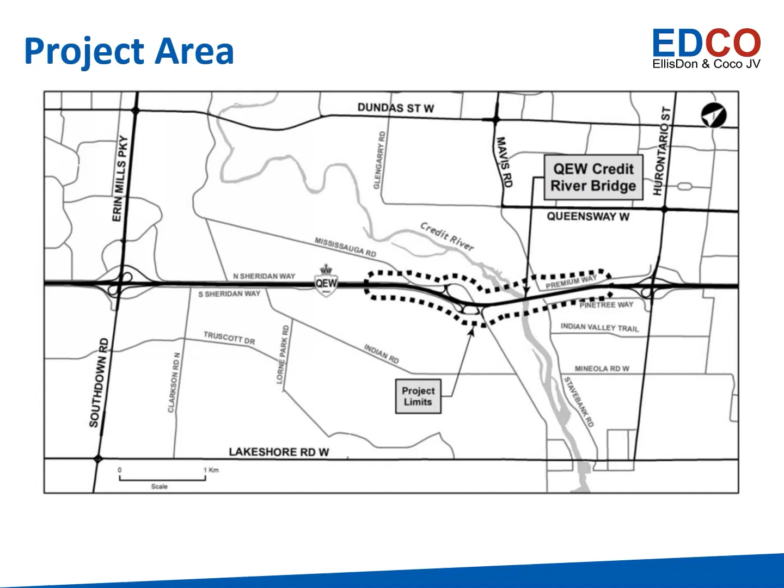The purpose of this PIC is to present the designs for the following project components and receive feedback on the rehabilitation of the existing QEW Credit River Bridge, active transportation crossing of the Credit River, landscape design, commemorative strategy, detailed design refinements, and traffic staging.

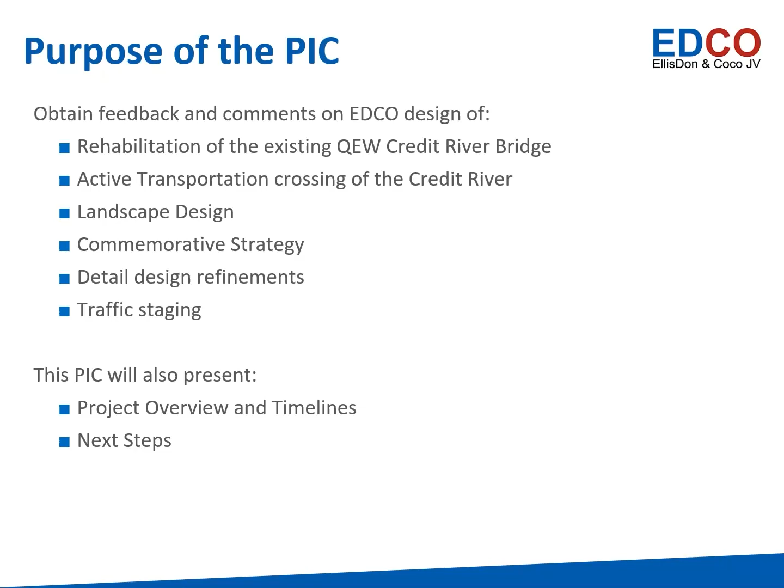This PIC will also present project overview and timelines, and next steps. Materials related to this PIC will be available on the project website for you to review and provide comments on the PIC event and during comment period. Directions and opportunities to provide comments will be identified during this presentation and available to you through the project website.

The QEW Credit River Improvement Project involves several components. EDCO has started construction of the components of the project for which detailed design was completed. The design of these elements was documented in Design and Construction Report Number 2, which was made available for stakeholder review in January of 2021.

This included the new QEW bridge over the Credit River and widening of the QEW mainline highway to accommodate the widening of the highway, reconfiguration of the Mississauga Road interchange with replacement of the existing bridge at Mississauga Road.

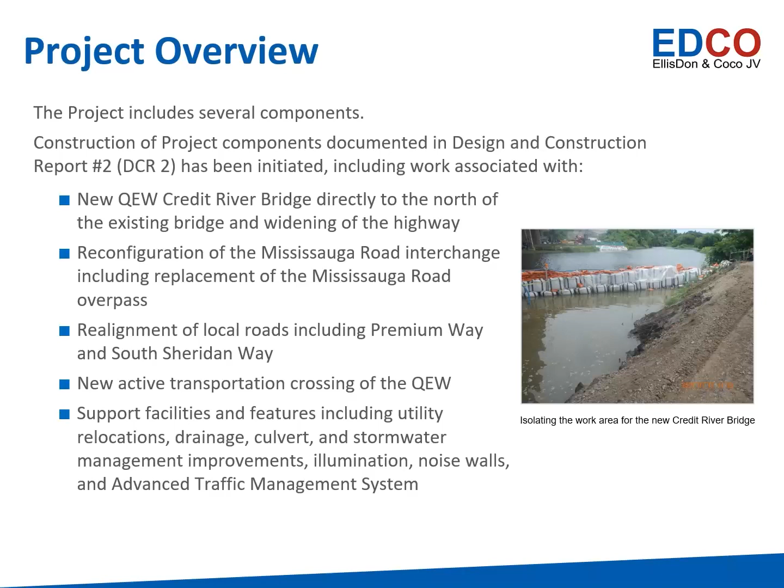Realignment of local roads including Premium Way and South Sheridan Way, new active transportation bridges over the QEW, support facilities and features including utility relocations, drainage, culvert and stormwater management improvements, illumination, noise walls, and advanced traffic management system.

Since January 2021, EDCO has been able to advance design for the other components of the project, including works associated with rehabilitation of the existing QEW bridge over the Credit River, new active transportation bridges over the Credit River and over the QEW highway near Stavebank Creek, landscape design.

Initial design elements associated with the commemorative strategy have also been identified. This project is following the requirements of a Group B project under the MTO Class Environmental Assessment for Provincial Transportation Facilities, also known as the MTO Class EA process.

Comments and feedback on the design being presented at this PIC are being collected to assist EDCO and MTO to meet the requirements of the MTO Class EA and the Ontario Environmental Assessment Act.

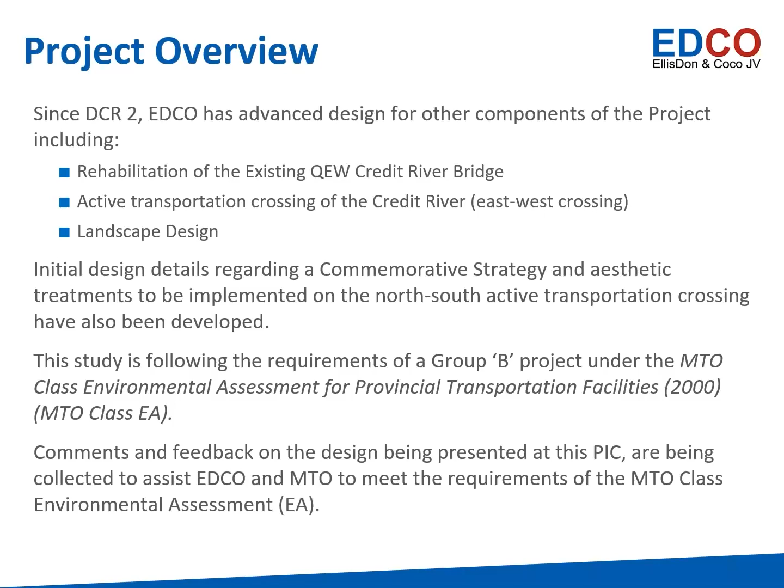EDCO's involvement in the project began in fall 2020 when we were selected to design, build, and finance the project. One of our first tasks was filing of Design and Construction Report Number 2 for stakeholder review and comment in January 2021.

Environmental clearance for DCR2 work was first issued in March of 2021, allowing for construction of project elements detailed in DCR2 to begin. Construction by EDCO then started in April 2021. Hosting the Public Information Center on August 5, 2021 is our current status.

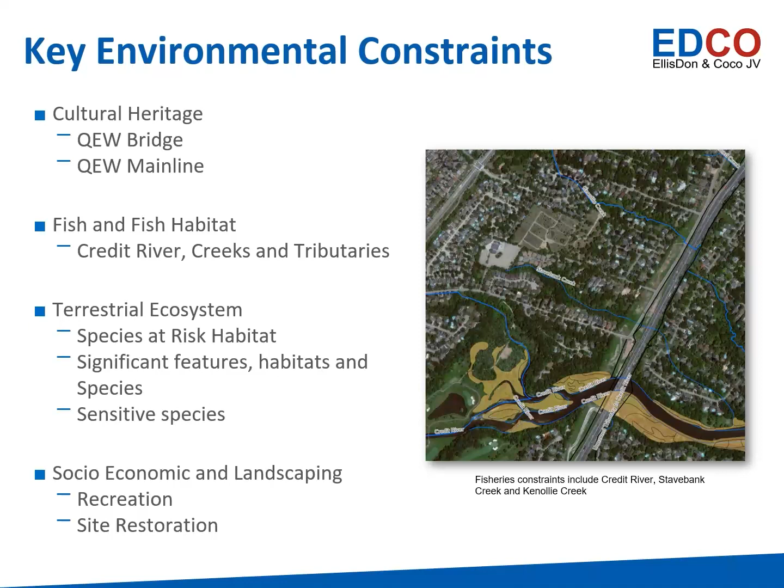The landscape of the project limits is important to those who live in the nearby neighborhoods, as well as those who visit and commute through the area on the highway and local roads.

EDCO is committed to protecting the environment during design and construction of the project, and has developed and implemented several environmental management plans. The various environmental plans identify protection measures such as fencing, signage, and exclusionary measures to ensure wildlife cannot enter work areas and workers do not enter sensitive natural areas.

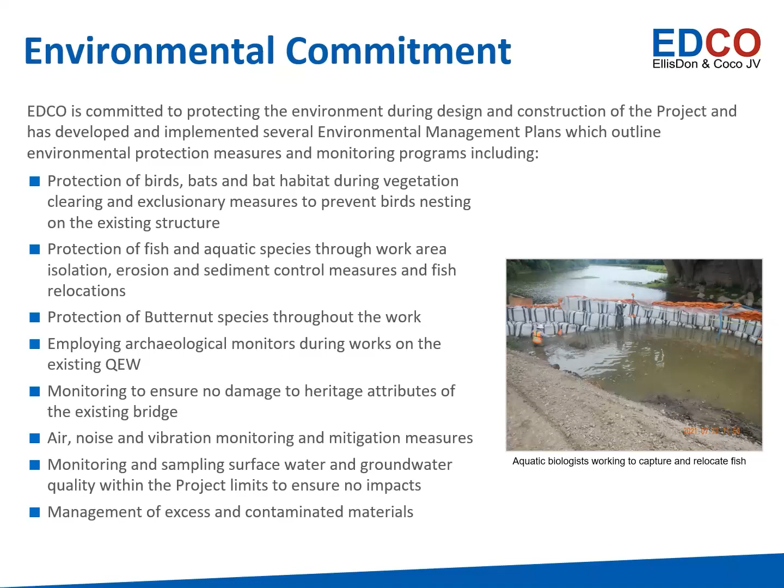These plans identify timing restrictions, limiting work to certain seasons or times of day so as to minimize potential impacts. They include monitoring requirements to ensure work is being completed in accordance with the management plans and regulatory standards and specifications, and inspection requirements to ensure protection measures are working effectively and identify any measures needing repair. These plans will be in effect throughout the project and updated continuously by EDCO.

The major work to rehabilitate the existing bridge will be to replace the existing bridge deck and barrier walls. This work will be initiated in 2023, once traffic has been shifted to the new QEW Credit River Bridge.

Rehabilitation work includes removal and replacement of the deck and floor beams in the main and approach spans of the bridge, construction of new concrete barrier walls, replacement of the existing double joints with single jointed expansion joints, and removal of the abutment joints, rehabilitation of the concrete substructure including the arch ribs, spandrel columns, piers, wing walls, and abutment, as well as installation of transparent noise barrier.

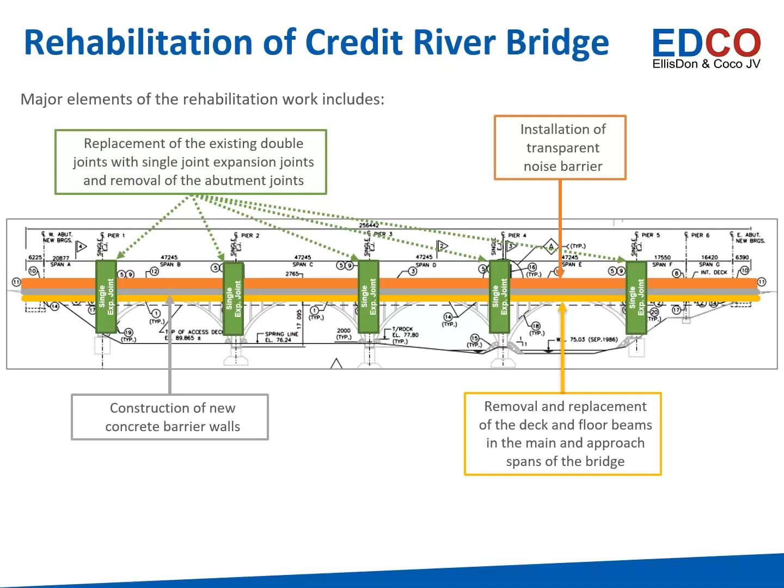Upon completion of the rehabilitation works, the existing bridge will have a transparent noise barrier wall, which is not visible on this cross-section, but will be installed on the outside of the bridge along the eastbound lanes. The noise wall will be mounted on the outside of the barrier walls.

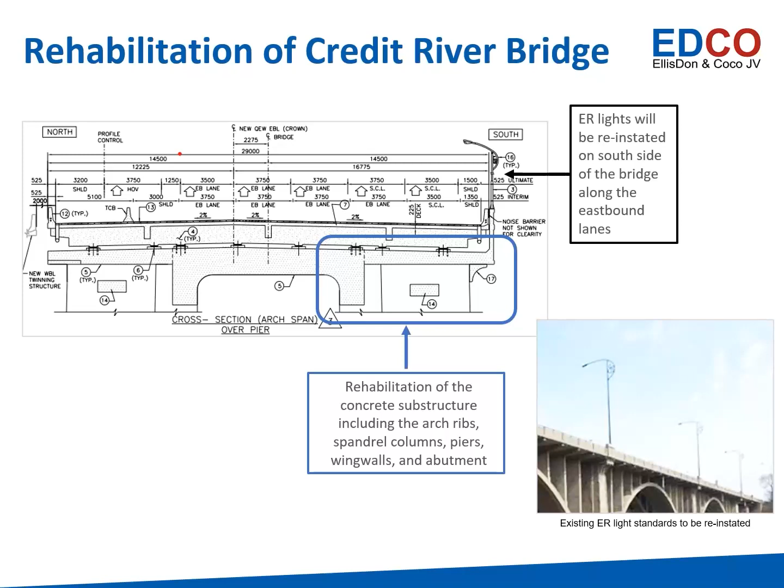The ER lights will be reinstated on the south side of the bridge along the eastbound lanes. The ER lights previously on the north side along the westbound lanes will be installed on the north side of the new bridge to recreate the existing view of the lights arching over the highway corridor, similar to what you see now. The lights will be positioned so the vertical frame post for the noise barrier wall will not obstruct the view of the light poles.

As noted previously, a key heritage element of the project is the QEW Credit River Bridge, which was identified as a provincial heritage property of provincial significance by the MTO under the Ontario Heritage Act in September 2009.

Construction of this major transportation route between Toronto and Hamilton was one of the most influential highway developments in Ontario's history, with the Credit River Bridge being the first major structure built along the corridor. As seen in this image, the QEW Credit River Bridge served as an excellent example of a spandrel arch bridge in Ontario, and it is the longest of the first four bridges built along the initial portion of the QEW.

As part of this project, a heritage attribute monitoring plan has been developed to guide the design and construction for the rehabilitation of the QEW bridge to best retain and protect heritage elements of the existing bridge.

In order to retain the heritage attributes of the structure, rehabilitation work includes preserving and repairing the existing piers, arch ribs, and spandrel columns, piers and wing walls, ensuring new concrete-related works match the existing concrete. EDCO has hired a specialist with proven experience in the repair of historic concrete to monitor construction activities related to rehabilitation of the existing QEW Credit River Bridge.

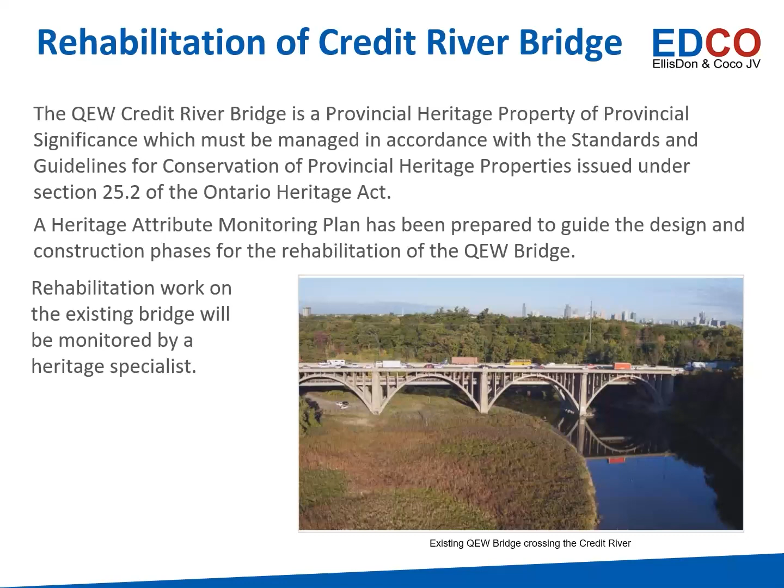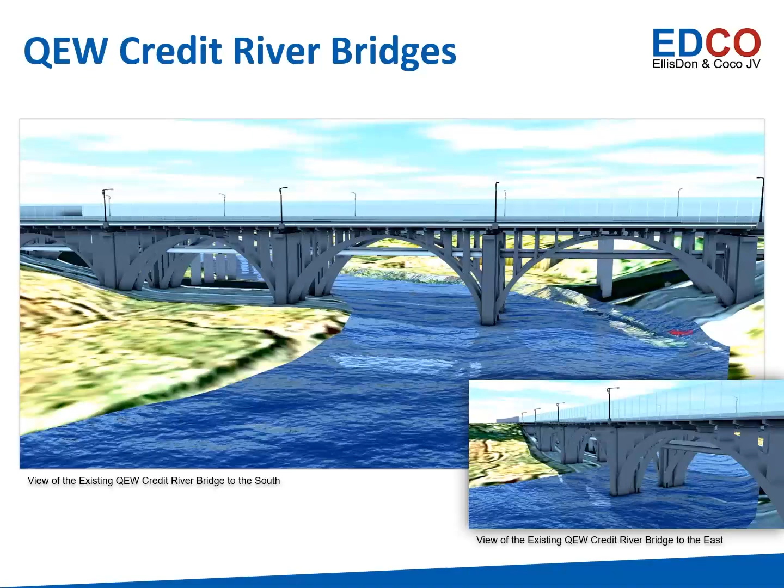There are two active transportation crossings included in the QEW Credit River Improvement Project. The north-south active transportation crossing will cross the QEW highway near Stavebank Creek and was previously documented in DCR2. The east-west active transportation crossing will cross the Credit River underneath the existing QEW Credit River Bridge. This east-west crossing is possible through retrofitting an existing maintenance structure, and it will be connected to the multi-use pathway on both sides of the river.

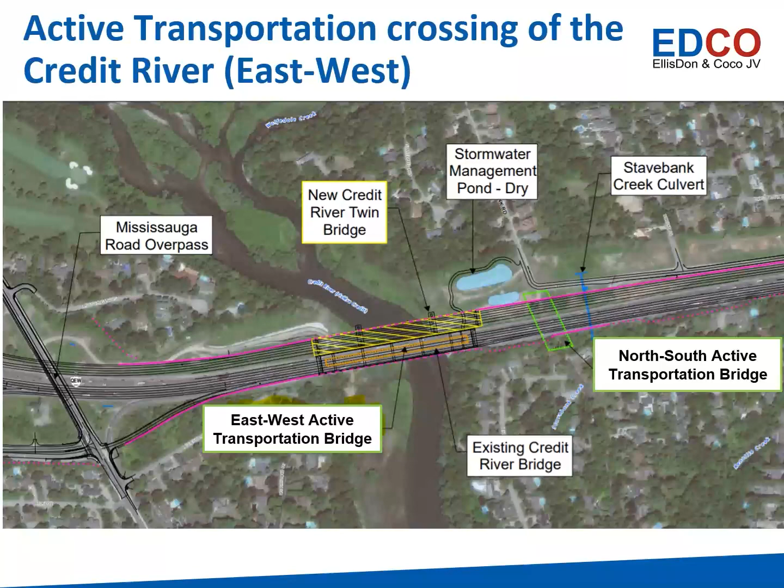Design of the east-west active transportation crossing includes pole-mounted lights to give visibility at night and during low light conditions, protective picket barrier with guardrails and handrails. The picket barrier will provide safety while still permitting views of the river and valley.

The deck surface will provide a stable and accessible surface for walking, running, cycling, and mobility assistive devices. The picket and railing system along the outside will provide safety to those traveling along the bridge, while creating an open view of the river, valley, and the structural elements of the QEW Heritage Bridge. Design details for the east-west active transportation crossing will be defined in the DCR3 and made available for public review.

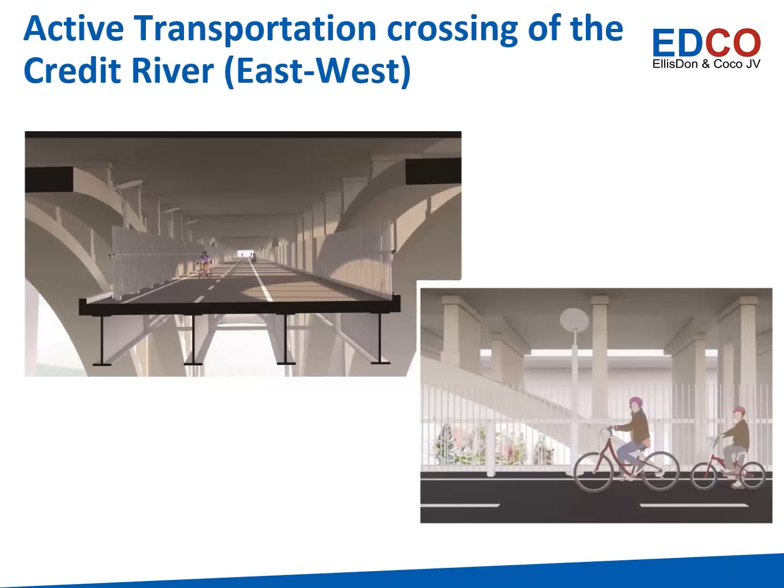Landscaping and ecological restoration will offset the impacts of construction and related activities on the existing environment, with a design intended to support new natural communities that provide seamless connections for wildlife and other stakeholders in the area. The landscaping design has been informed by field investigations to confirm existing conditions related to invasive species, any species at risk, and rare plants, and environmental protection measures to restabilize environmentally sensitive areas, such as the banks of watercourses.

Restoration plantings in areas of environmental sensitivity. Landscape planning, which includes deliberate use of plantings and landscape architecture to protect and enhance ecologically significant areas. Wildlife planning, which involves planning the work and landscaping or ecological restoration to minimize impacts to wildlife and restore areas as soon as possible.

Monitoring during construction to ensure measures and design adapt to any changes in design or construction, and post-construction to ensure successful establishment of the plantings and vegetation.

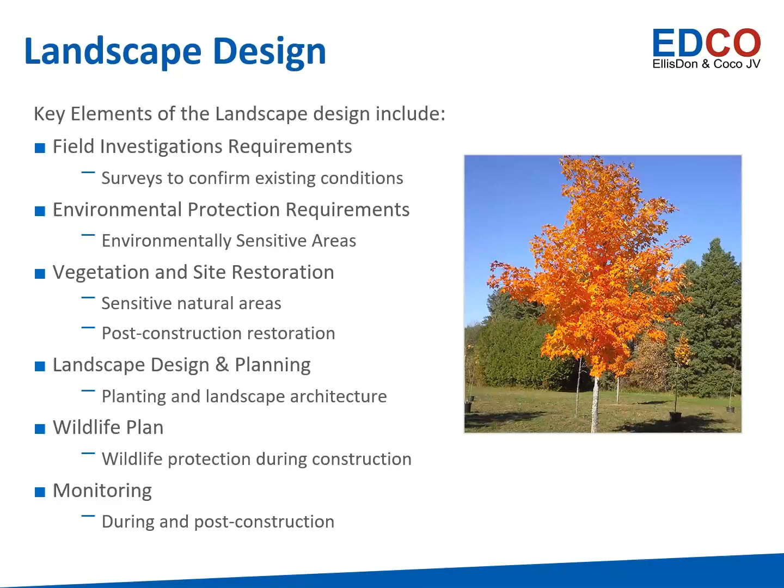The multi-use trail will have landscape plantings integrated with the trail and provide seating opportunities at regular intervals. Commemorative displays will be installed along the trail, with one commemorative display to be installed near the trailhead at Mississauga Road.

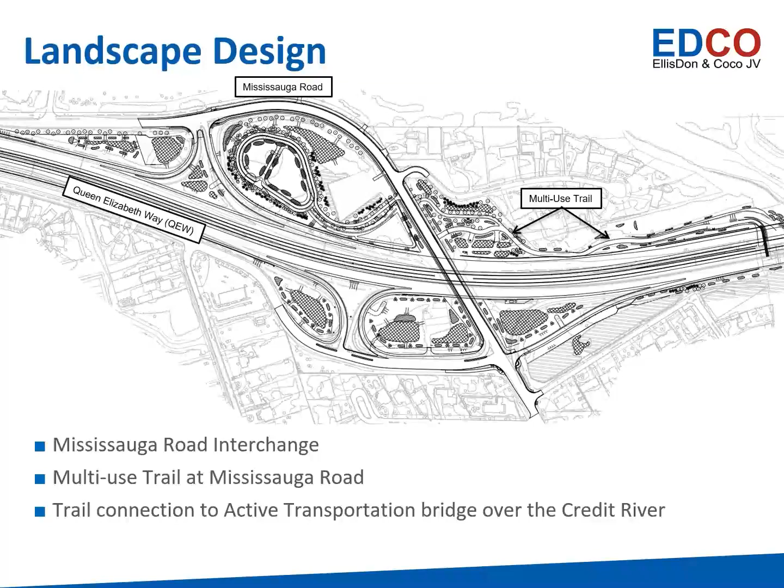Landscape plantings within the dry pond. Plantings and landscape design from the Credit River to the project limits to restore areas where vegetation was removed during construction.

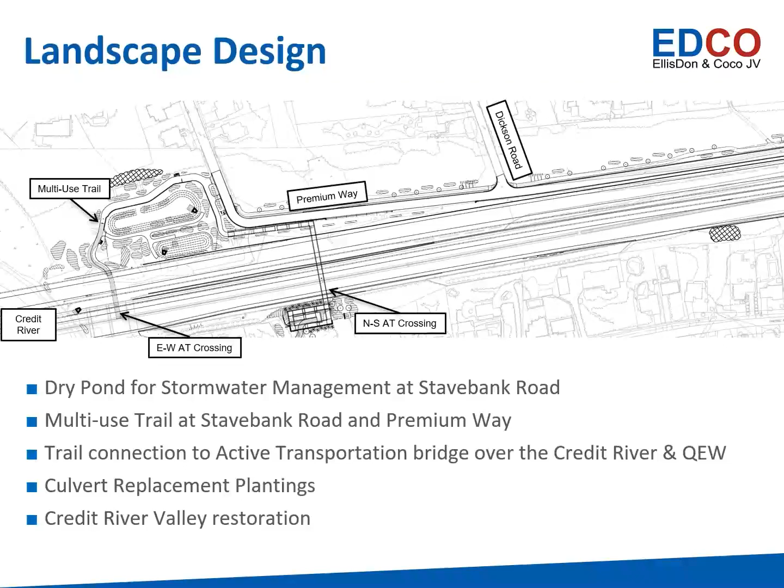Commemorative displays will be installed along the trail, with one display located near the trailhead at Stavebank Road and Premium Way. Landscape designs and the selection of plant types have been selected in consultation with the City and Hydro One, and will incorporate native plant species consistent with those recommended by the Credit Valley Conservation Authority.

This image is a rendering of the proposed landscape design along Premium Way. Here we can see proposed green spaces, shrubs and trees, which will improve the overall aesthetics of the area with natural features. The plantings along Premium Way will have downy serviceberry, which is a deciduous tree species.

Shrubs will include bush honeysuckle, meadow rose, maple leaf viburnum, and winterberry. And the ground surface will be seeded with the Credit Valley Conservation Upland Native Meadow Mix, which will include black-eyed Susan, goldenrod, heart-leaved and New England asters, and open field sedge.

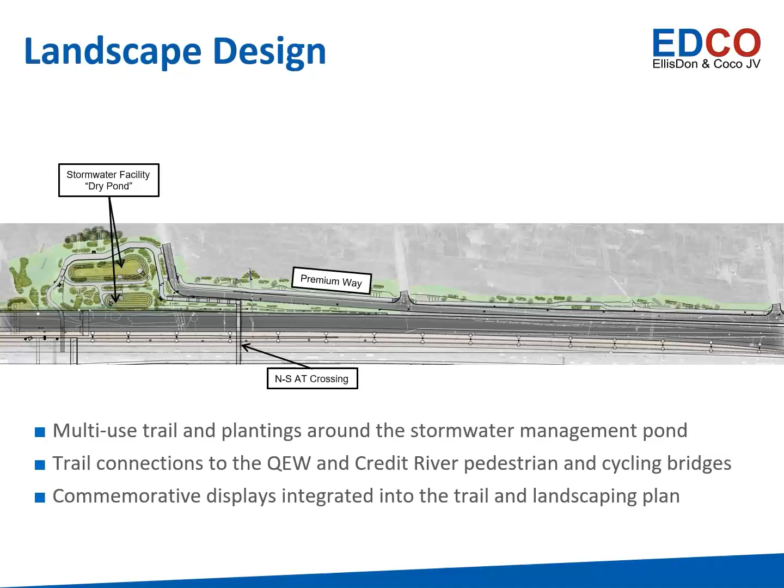The ministry developed the conceptual commemorative strategy through two workshops with key stakeholders to discuss heritage features, suggest topics of commemoration, and consider locations where the commemorative features could be situated within the project limits.

The environmental features recommended as subjects to commemorate included the QEW Credit River Bridge, indigenous significance of the area, and the natural environment. The content and design of the commemorative installations is still being refined. Additional details of the commemorative strategy will be provided in DCR3, which will be made available for stakeholder review.

Locations recommended for the commemorative strategy elements include the placement of individual topic displays at 4 locations along the active transportation trail between Mississauga Road and Premium Way and crossing over the Credit River. As shown in red, the first location is within a pedestrian plaza near the Mississauga Road trailhead.

The second and third locations are mounted displays on the active transportation bridge over the Credit River. The fourth location is within a pedestrian plaza near the edge of the river valley, an open area associated with the landscaped stormwater management pond.

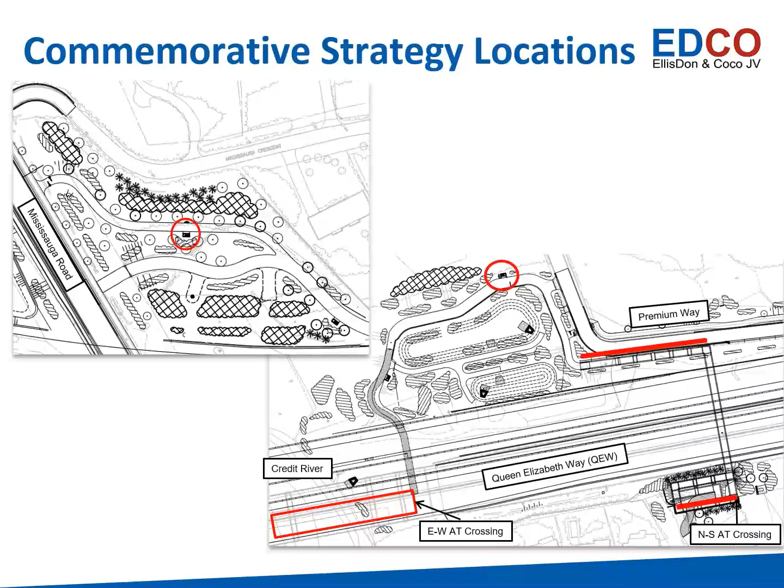In addition to the commemorative displays, aesthetic treatments will be integrated with the north-south active transportation crossing of the QEW. Based on suitable space and visibility, the proposed treatments will be incorporated on the retaining wall for the pathway ramp along Premium Way, which will be visible to pedestrians along the local trail and as you travel south on Stavebank Road before making the turn onto Premium Way.

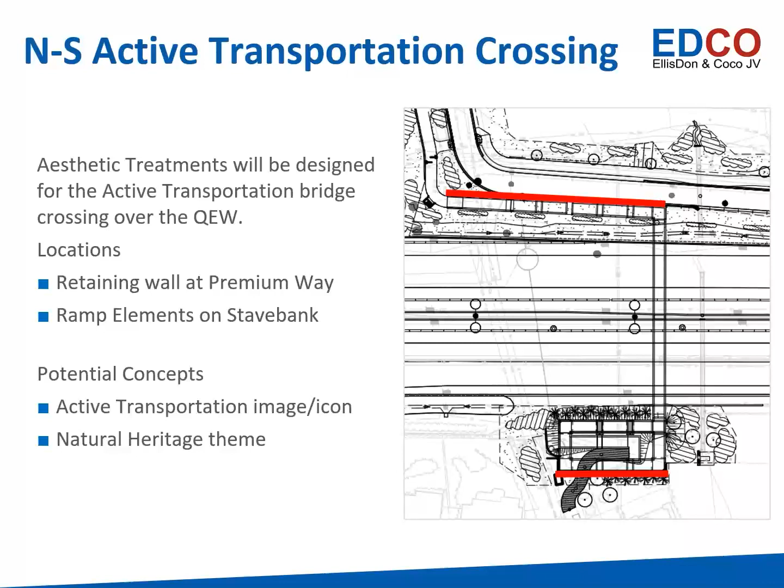The other location involves placement of treatments on ramp elements on the south side of the QEW for people entering from the Stavebank Road access of the bridge crossing. EDCO is working with the City of Mississauga to confirm the location and design of the aesthetic treatments. Additional details will be provided in DCR 3, which will be made available for stakeholder review.

The design for the culvert at Stavebank Creek, known as C6, has changed since DCR number 2 was published in January 2021. The design change was necessary to accommodate the criteria for the Trans-Northern pipeline that runs parallel along the north side of Premium Way.

The refinements to the C6 design result in a shorter culvert, allowing for more open channel than the previous design. EDCO's design incorporates natural channel designs and takes into consideration drainage, fluvial, and fisheries elements to minimize impacts to fish and fish habitat. EDCO has consulted with the Department of Fisheries and Oceans to obtain a revised approval under the Fisheries Act for this refinement.

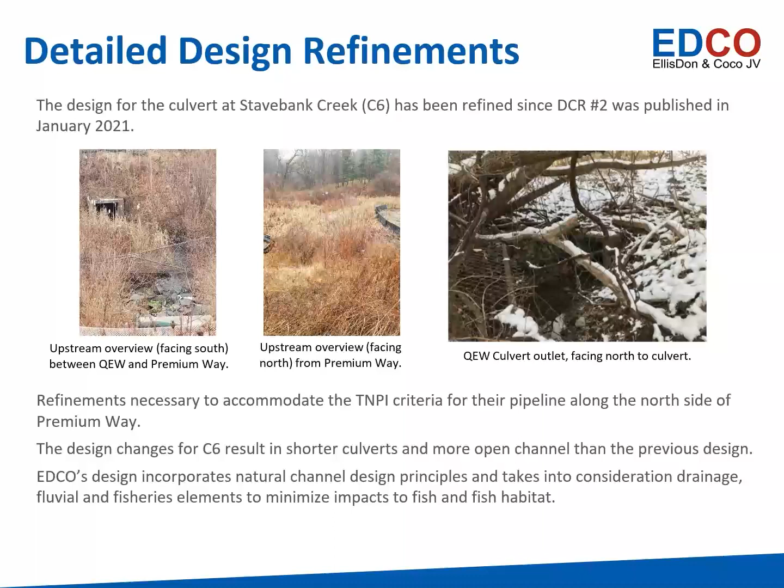The construction schedule identifies the construction timing for key elements of the project. Work is underway throughout the project limits, having started in April 2021 for design components documented in DCR 2.

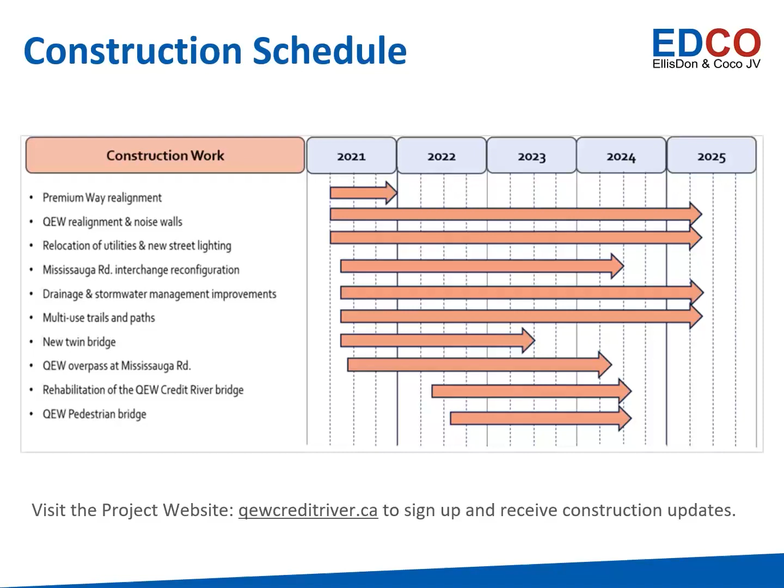Construction of the new bridge over the Credit River will finish in 2023, allowing traffic to be shifted off the existing QEW Credit River Bridge so that rehabilitation work may proceed while maintaining traffic in both directions through the project limits.

Temporary traffic restrictions are required to allow for work to occur safely. They can also allow for work to be completed quicker, resulting in less overall impact. Current traffic restrictions include the Premium Way long-term closure, summer to fall 2021.

Direct access to Premium Way and the few neighboring streets and properties will be temporarily closed to local traffic. Access will be provided via either Stavebank Road or Harborn Road, depending on the construction stage.

QEW westbound on-ramp and Mississauga Road closure, summer 2021 to fall 2023. On-ramp traffic will be detoured to the Erin Mills QEW interchange via North Sheridan Way. The detour will be signed during the closure of the on-ramp to QEW westbound.

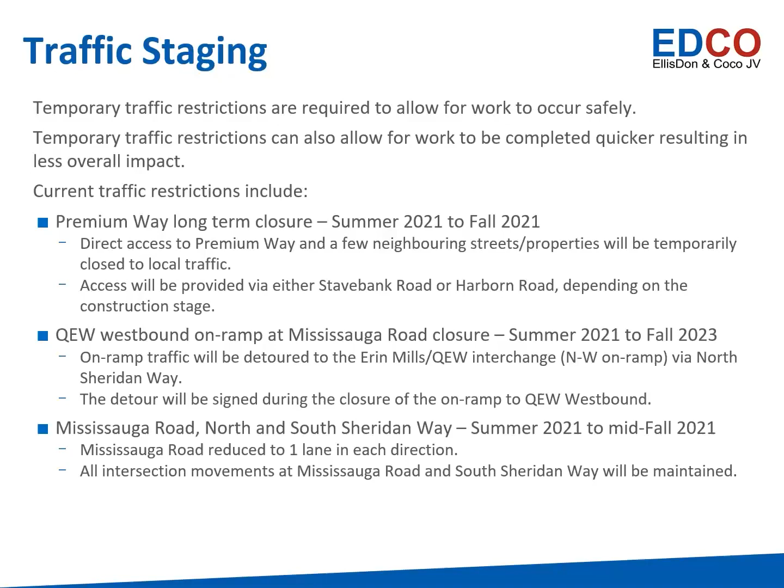Mississauga Road, North and South Sheridan Way, summer to mid-fall 2021: Mississauga Road reduced to 1 lane in each direction. All intersection movements at Mississauga Road and South Sheridan Way will be maintained.

Future traffic restrictions will include temporary closure of Mississauga Crescent to Mississauga Road southbound traffic, with northbound right-in, right-out only. The QEW eastbound on-ramp from Mississauga Road will be closed, with QEW eastbound access via South Sheridan Way. There will also be nightly lane closures of the QEW and on and off ramps at Mississauga Road.

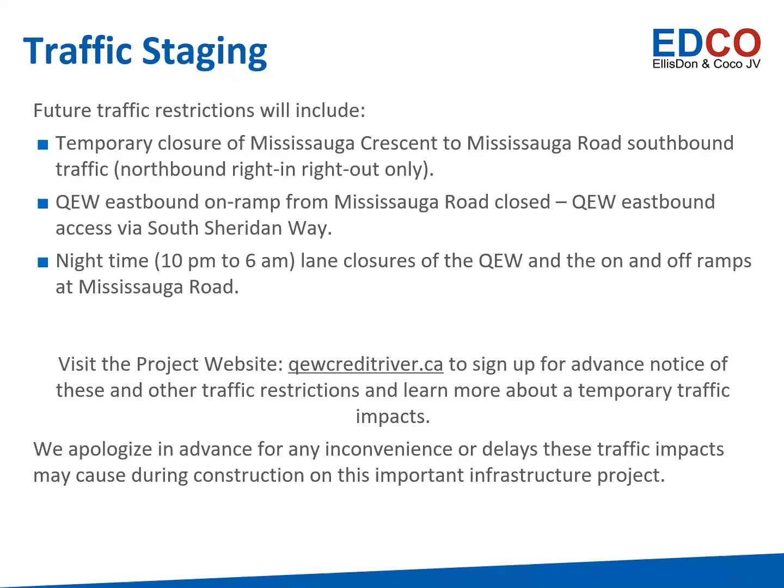We encourage you to sign up to receive advance information related to traffic restrictions. To sign up and learn more about temporary traffic impacts, visit the project website at qewcreditriver.ca. We apologize in advance for any inconvenience or delays these traffic impacts may cause during construction on this important infrastructure project.